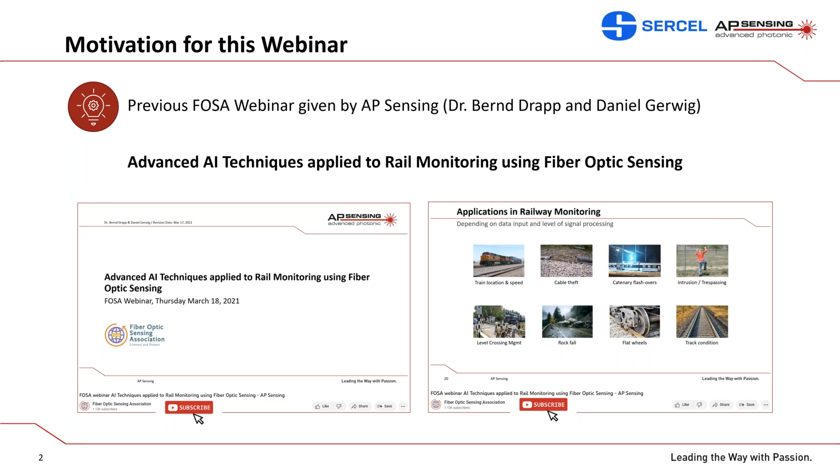So in this webinar, we will offer an overview of both companies, AP Sensing and Sercel, detailing the technologies that these companies provide and delving into various case studies that cover both above and below the rail track. Following the AP Sensing part, I will hand over to Ellen. She will present Sercel and introduce an innovative approach on how trains can be utilized to understand what's going on below the ballast. So AP Sensing is a global leader in distributed fiber optic sensing. We provide distributed fiber optic sensing instruments and solutions for various applications. Our headquarters is located in Böblingen, a small city in southern Germany near Stuttgart.

Although officially AP Sensing was founded in 2007 as an independent company, our roots and experience in fiber optics extend far into the past. AP Sensing originated from the fiber optic measurement business through several spin-offs. The first occurred in 1999 when part of Hewlett-Packard's business, including fiber optic test equipment, transitioned into Agilent Technologies. And in 2007, the second spin-off occurred when the fiber optic business separated from Agilent Technologies to form AP Sensing. We operate as an international company with over 100 employees across 4 continents. AP Sensing holds all necessary ISO certificates in quality management, environmental management, work safety management, along with different important industry certifications.

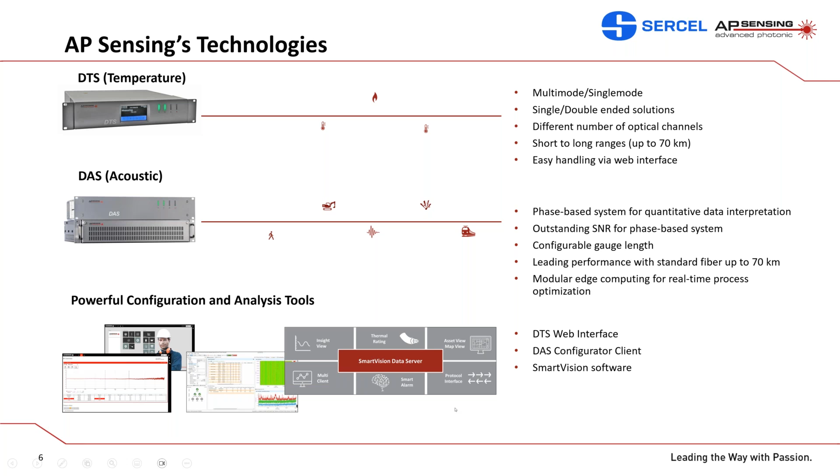Our DAS instrument is a phase-based system that offers quantitative data interpretation. It stands out with an outstanding signal-to-noise ratio and great performance utilizing just a standard fiber. Notable features of our DAS include, for example, configurable gauge lengths and edge computing for real-time process optimization. AP Sensing is not only a manufacturer of distributed fiber optic systems, we're also a software company, so we provide powerful configuration and analysis software tools. These software tools extend our services beyond the instrument to data interpretation and data analysis. So at AP Sensing, we operate in various markets and applications.

We also work in oil and gas upstream applications, different geo-related applications, and of course, we work with our systems in the railway industry, the topic of today's webinar, including such applications as train tracking, asset condition monitoring, cable theft, intrusion detection, and tunnel monitoring.

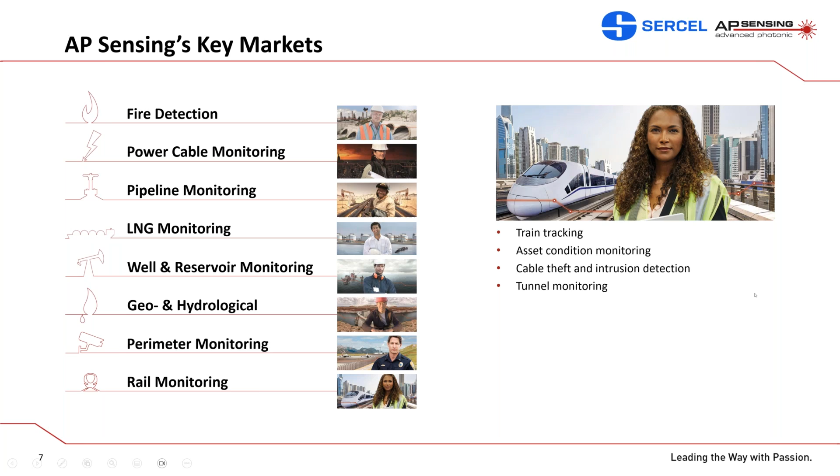So the idea of the method: we plug a fiber into the DAS. The instrument sends a laser pulse into the fiber. Fibers are not perfect. There are always very tiny microscopic defects randomly spread along the fiber. When the light pulses propagate along the fiber, part of the light is subjected to Rayleigh backscattering. This backscattered light goes back to the system, and the interrogator analyzes this backscattered signal.

The position of the acoustic events that affected the fiber can be determined by measuring the temporal dependence of the returning signal, like a radar echo. So what if we place this DAS concept in the context of railway monitoring? Of course, we will need a DAS system, and we will need a fiber optic cable.

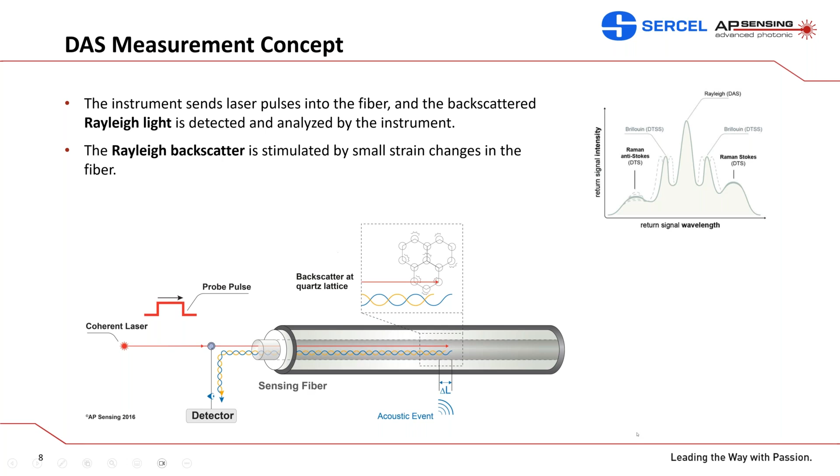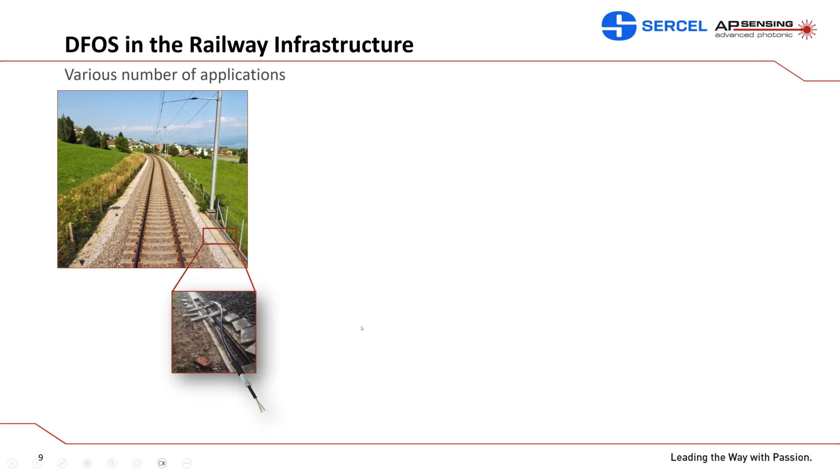Actually, in railway monitoring, the availability of fiber is not typically an issue, as there is most likely an existing trackside telecommunication cable infrastructure, like shown in this picture. Here's the cable in the trough, and we can just utilize the existing fiber optic cable. We do not need to deploy any special fiber, which allows us to transform the standard cable into a sensing cable and enables us to utilize DAS in various areas of the railway infrastructure.

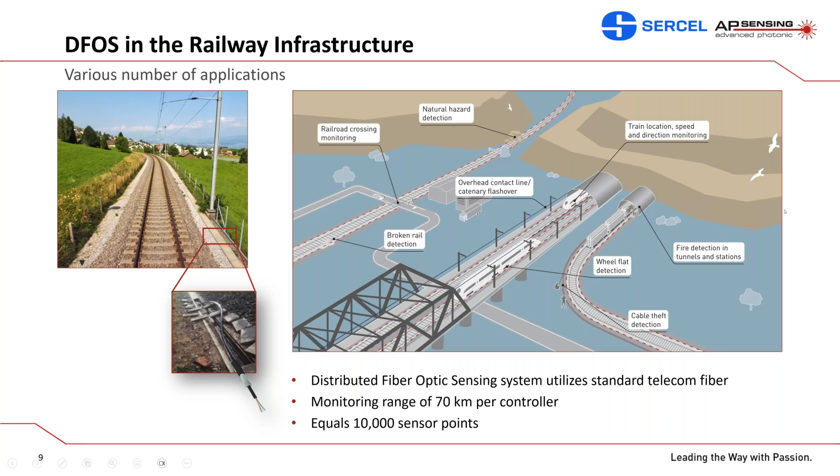For example, train location, speed and direction monitoring, flat wheel detection, natural hazard detection, short circuit localization, and many other applications. Fire detection is also possible with fiber optics, but since it's about DTS, we're not going to cover it in today's webinar.

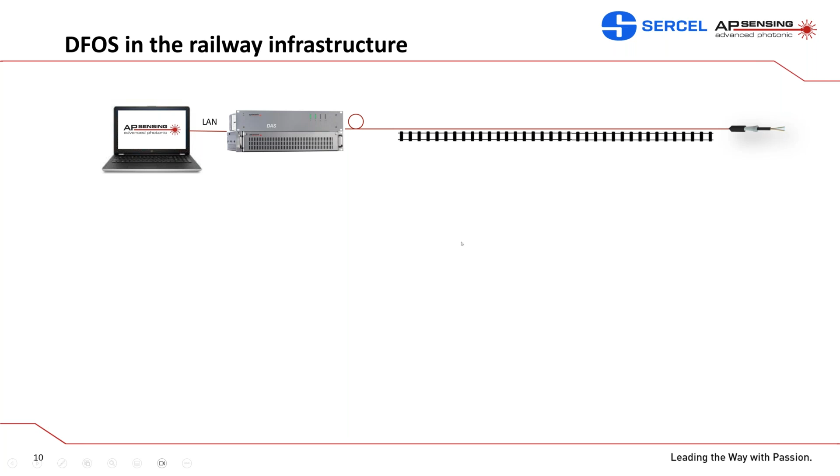Since I will be showing several case studies on DAS data and how this data can be interpreted and presented, I would like to start with a very simplified explanation of how DAS and the fiber work in the context of railway monitoring and what kind of data we can see. Let's consider this simple example: the rail track, the existing fiber along the rail track, DAS connected to the fiber, DAS connected to the laptop. If we have a train passing along the rail track, what can we see?

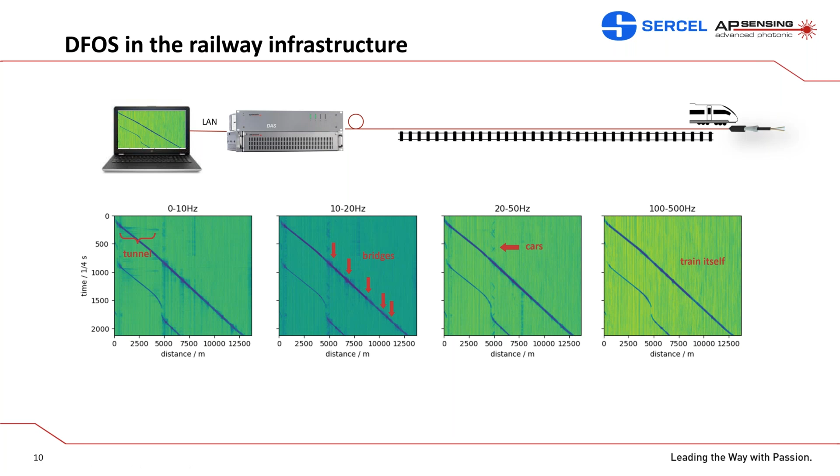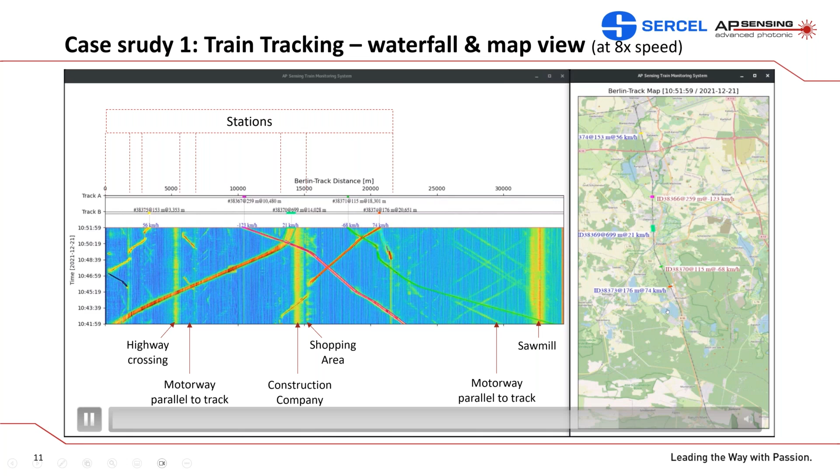The main outputs of DAS live tracking are train position, train length, velocity, acceleration, unique train IDs, and unique track IDs, since we can split the information that we receive from the train and from the track.

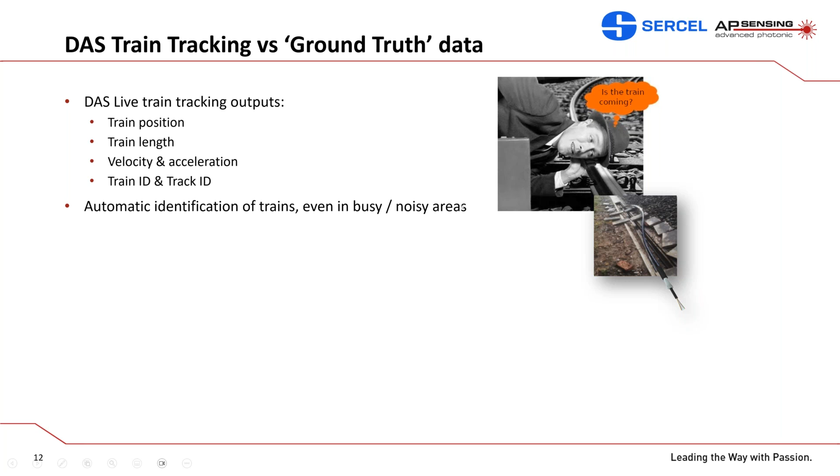Can we somehow prove this information that we're receiving from this fiber optic cable? Yes, there are several technologies available to measure train position and speed along the fiber, along the railway track. One of them is optical odometry.

Comparing the results of DAS live tracking and optical odometry, we see these results match quite well. So we're providing very accurate GPS position, speed, and length of the train utilizing DAS data. The positional accuracy is within the first meters.

DAS technology was proven for two parallel running tracks with one fiber. It works well with fiber installations in tunnels or on bridges, and it works well for both high-speed and low-speed trains.

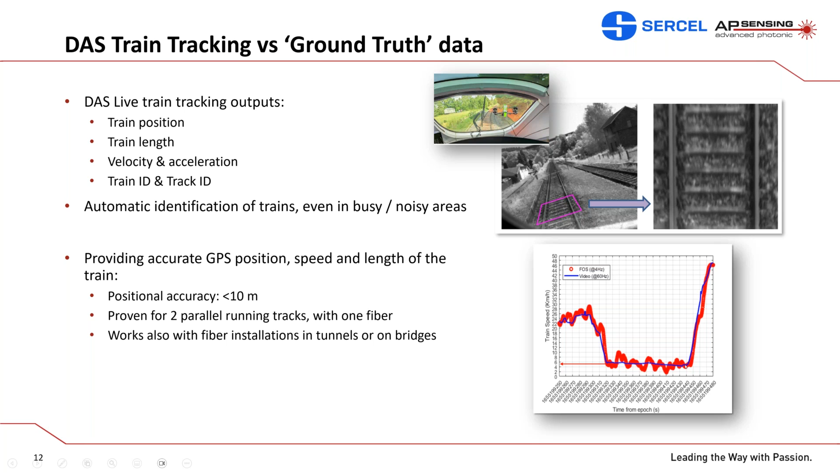Taking railroad assets as an example, distributed acoustic sensing can be an excellent tool not only for train tracking, but also for monitoring different railroad assets. For example, utilizing DAS data, we can efficiently localize short circuits along the railway.

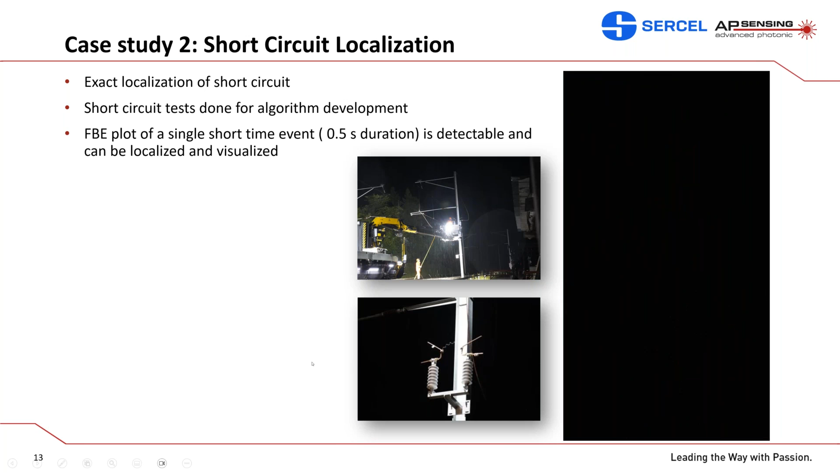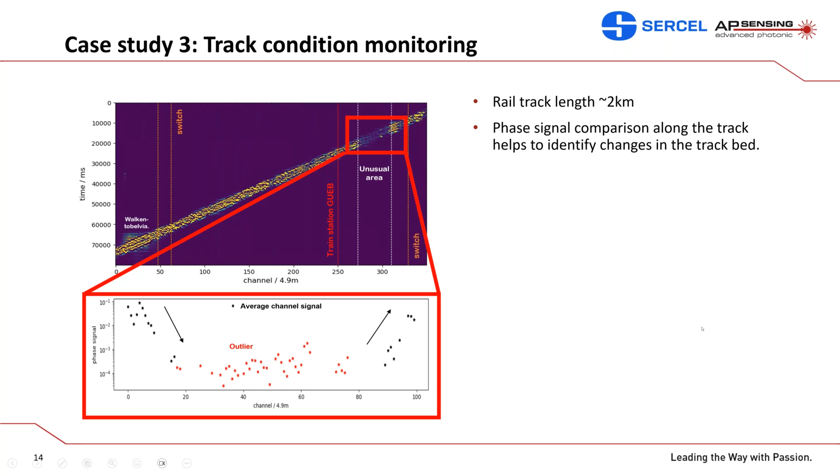Other assets that can be monitored with DAS and fiber are rolling stocks, as we can split the signal from the rail track and from the train. For example, when there is a flat wheel, it generates a distinct acoustic signature due to the different shape of the surface of this flat wheel. These irregularities lead to vibrations and noise when the flat portion of the wheel repeatedly touches the rail itself.

And this information gathered from the DAS can also contribute to maintenance planning and helps operator to fix and schedule maintenance activities more effectively.

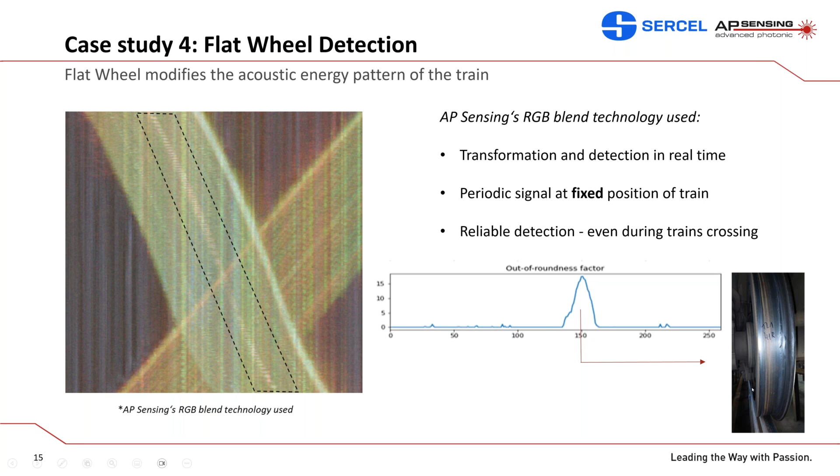So therefore, this is really helpful tool to understand that there are some third-party activities are going on along the track. And we can prevent the property damage and consequences from this kind of activities.

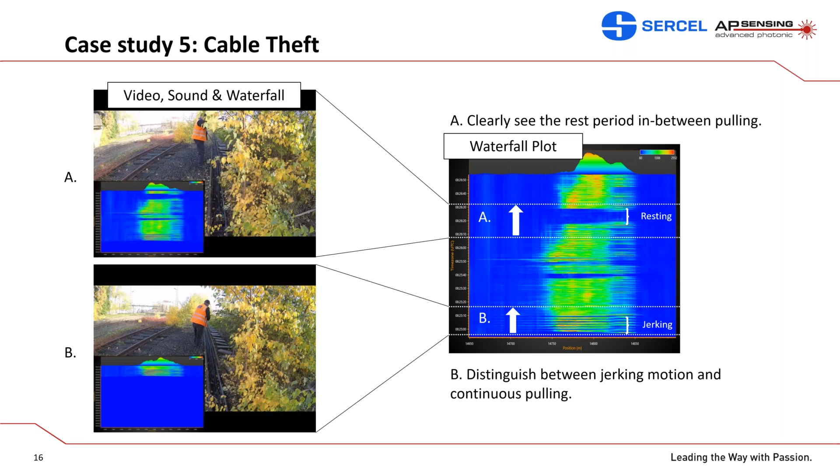So gradually we are moving towards the events that can approach the fiber optic cable, not from above the surface, but from below the surface. So what kind of acoustic events can be detected from below the surface? It's seismic waves, of course.

And the seismic waves can be generated by different events like earthquakes, explosions, large landslides, etc. So seismic waves are divided into two main types of waves that travel through the Earth's surface or along the surface.

Here's a very nice animation that represents these different types of waves. So here you see the waves traveling through the surface, let's say from the earthquake event, and another type of wave traveling along the surface. And here just a seismogram that detects these seismic waves.

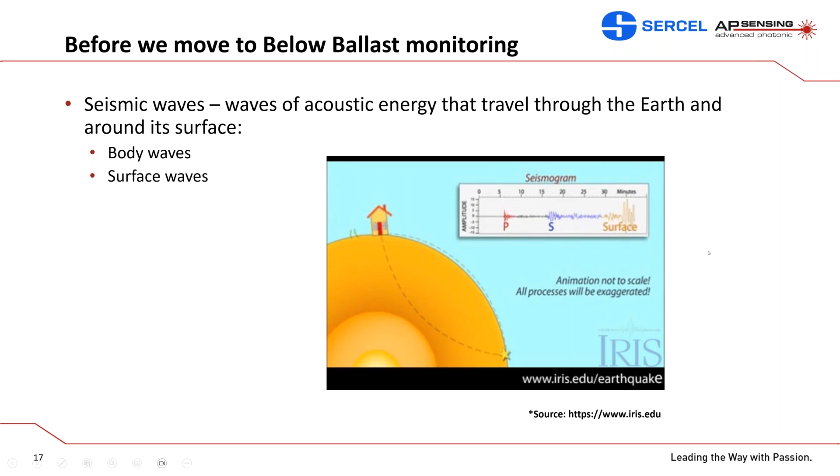So I would like to illustrate how the seismic waves generated by earthquakes can be detected by the DAS system using examples of two devastating earthquakes that occurred this year, one in February in Turkey and another one in September in Morocco. So here you can see some information about these earthquakes.

There was very high magnitude, but at different depths, and we detected these earthquakes, but they were located using the DAS in Switzerland along the rail track. You see that the distance between the earthquake location, the epicenter, and the DAS in case of the earthquake in Turkey is 2,600 kilometers. And in case of the earthquake in Morocco, it was around 2,300 kilometers.

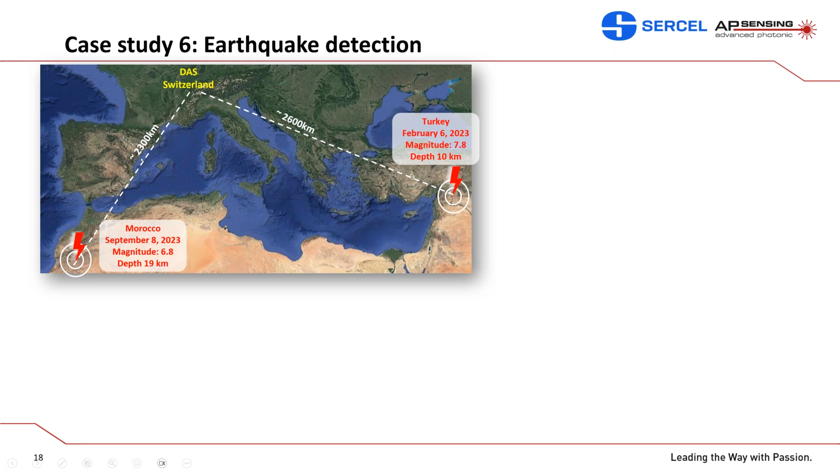So here we can see two waterfall plots detected from the earthquake from Turkey. Distance on the horizontal axis and time on the vertical axis. And this red signal, it's seismic waves that were detected by the DAS.

We do not see body waves really clearly, but we see the arrival of surface waves, and we see arrival of some waves during the aftershock events.

And here just another representation of this, utilizing just one of the DAS channels, like we used to see this data on the seismograms. Again, you see, we couldn't really identify body waves, but we can see the surface wave arrivals.

If we look at the Morocco case study, here's a bit more zoomed waterfall plot, just 500 meters and 5 minutes, but also we could detect the seismic wave arrival.

And here just another representation utilizing one of the DAS channels. Here we could see more clearly primary and secondary wave arrivals. And again, more signal came from the surface waves.

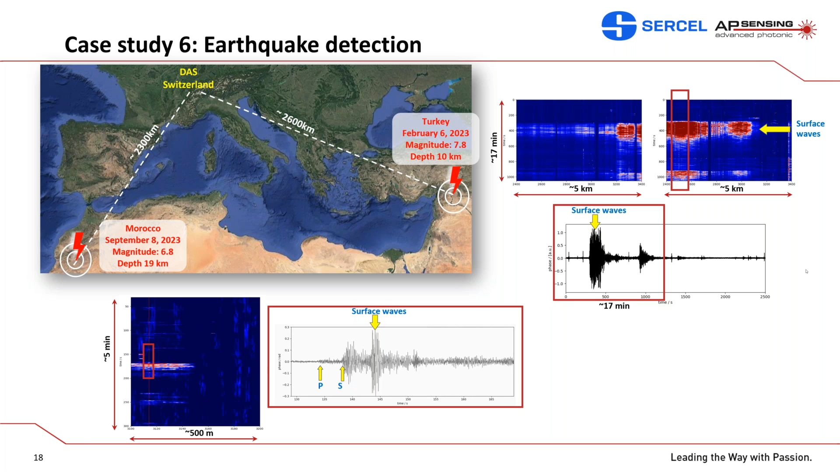Please. Yes, thanks, Lena, for the transition. That's a perfect transition.

I'm Hélène Toubiana, a geophysical engineer with 15 years of experience in seismic imaging.

Today I will speak about what can be done with fiber optics and the system below the ballast, thanks to seismic waves. I work for Sercel, a company that historically designs and manufactures equipment for seismic acquisition and provides geophysical processing for natural resources exploration. We have 1,050 employees worldwide with 800 engineers, and we are part of CGG Group, which is a leader in seismic imaging.

Sercel is a leader in seismic solutions. We create, produce, and integrate sensors for high-fidelity seismic imaging, like high-sensitive accelerometers and helically wound fiber. Maybe no one knows about this fiber: for every 1 meter of cable, you have 2 meters of fiber. This allows for more sensitivity in every direction and spatially reduces the gauge length.

Sercel also develops geophysical software and services. These sensors and services are used in different domains.

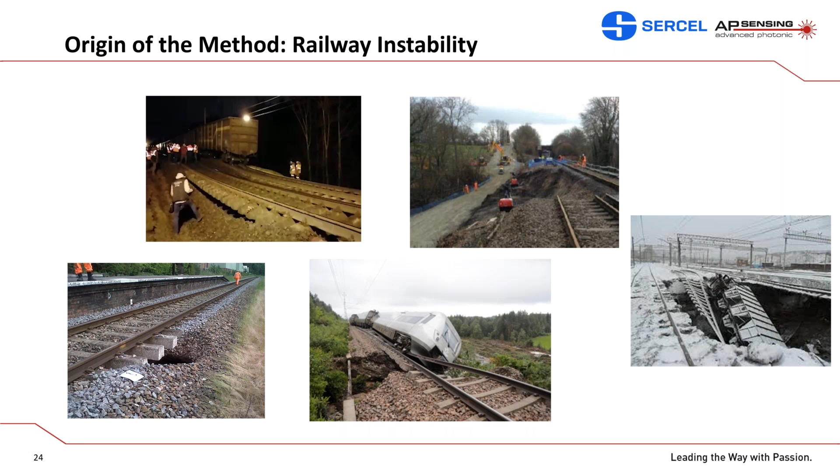This phenomenon is the impressive conclusion of a slow process of underground decompaction, coming from natural and anthropogenic origins. It starts with decompaction, then cavity growth with subsidence, and finishes with a sinkhole, which is the dramatic event. It can take years to develop.

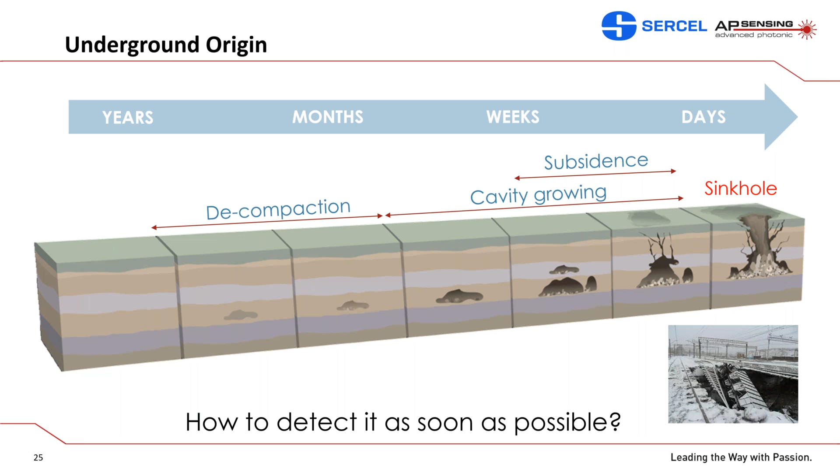The motivation of our work is to find a method to prevent this accident by detecting it as soon as possible. But how?

For this, we decided to develop a dedicated methodology based on the use of seismic waves generated by the train. Indeed, first I have a question for you: have you ever felt the ground vibrating below your feet when a train is arriving?

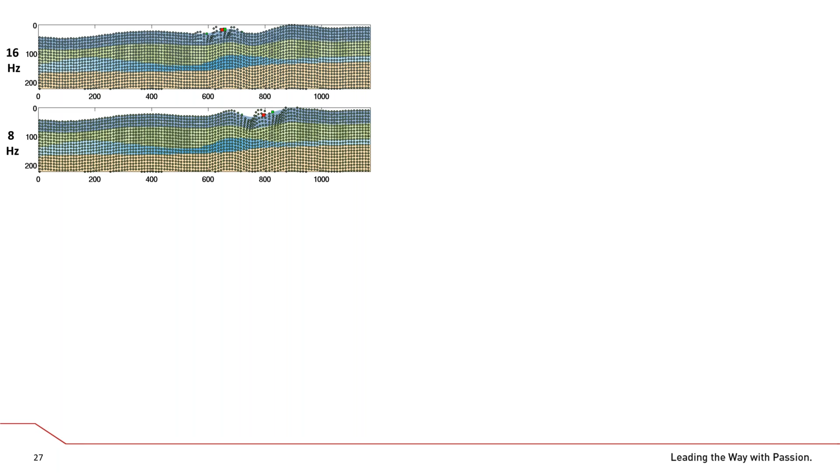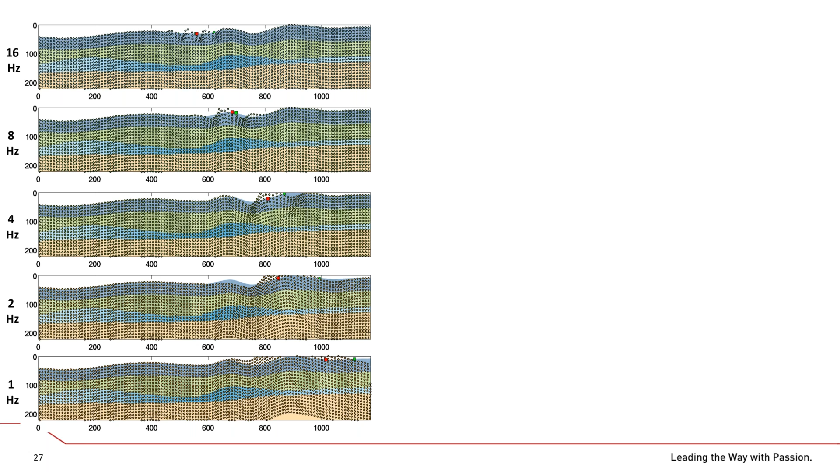If we decompose it into frequency bands, we can see that the high frequency content scans the very near surface. Lower the frequency, larger the wavelength, deeper the penetration, higher the propagation velocity, and faster the propagation.

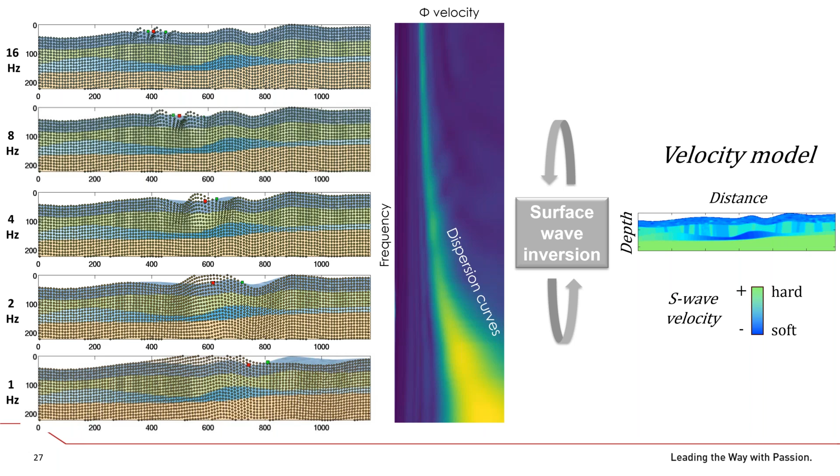That is what we call the dispersion behavior, and we can measure it thanks to DAS or accelerometers. After an inversion process, we can retrieve a velocity model of the near surface rocks. Stiff and soft areas will respectively appear as fast and slow velocity spots. That's how we can detect a zone under decompaction before a sinkhole occurs.

So the processing flow for this study is to record the signal along the railway, thanks to DAS or other sensors, then detect the dispersion curve, pick it, and run an inversion to obtain a velocity model of the subsurface.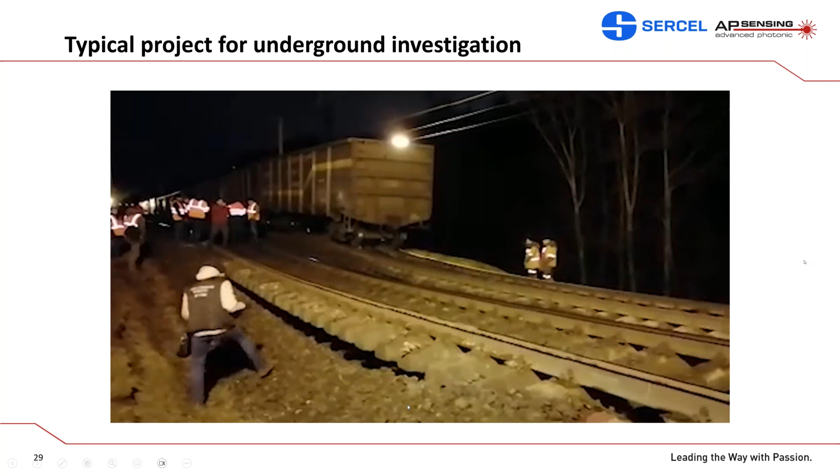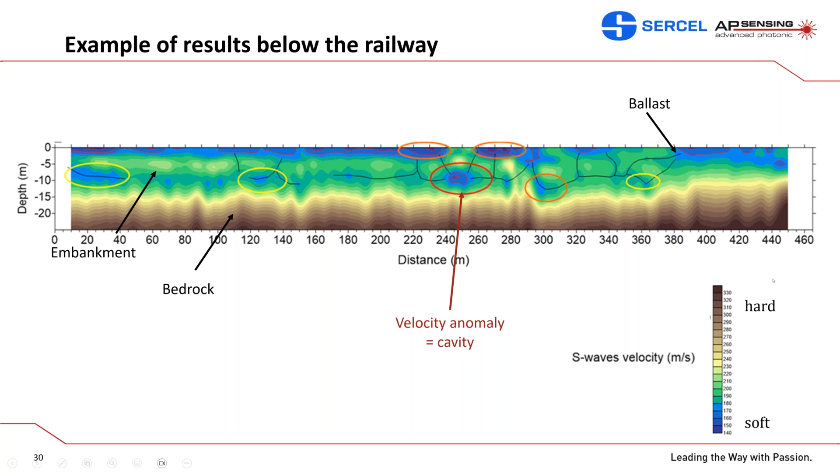This service was provided by using accelerometers for a few years now. But for many reasons, accelerometers are not adapted to be deployed in the long range. So we were thinking, what about DAS? Can we use that for the same application? Yes, there is a DAS opportunity.

Railways are linear assets, often equipped with telecom fiber, as Lena said previously. We wondered, can we use this fiber with the DAS system to perform the same image? Let's see it through different case studies. The first case study is about a project that has been done with SNCF on a high speed line. It's an area characterized by ballast instability.

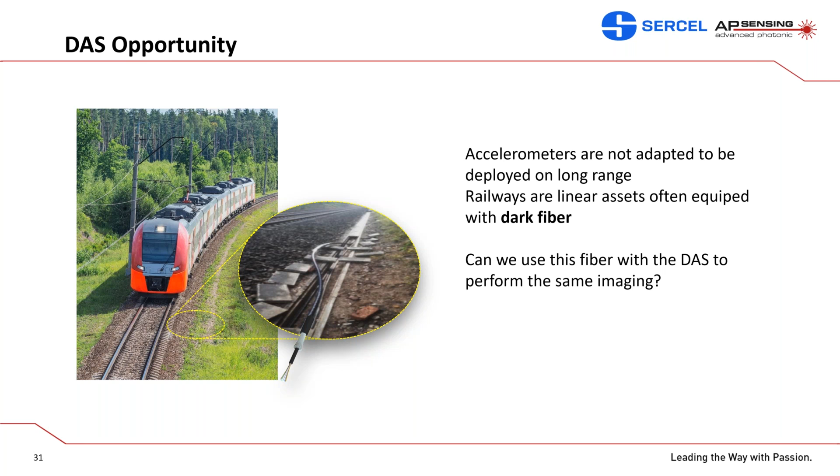The first target of this project was to identify if there is instability due to decompaction, and the second target was to benchmark and assess the capability of DAS to detect this decompacted zone. Next, please.

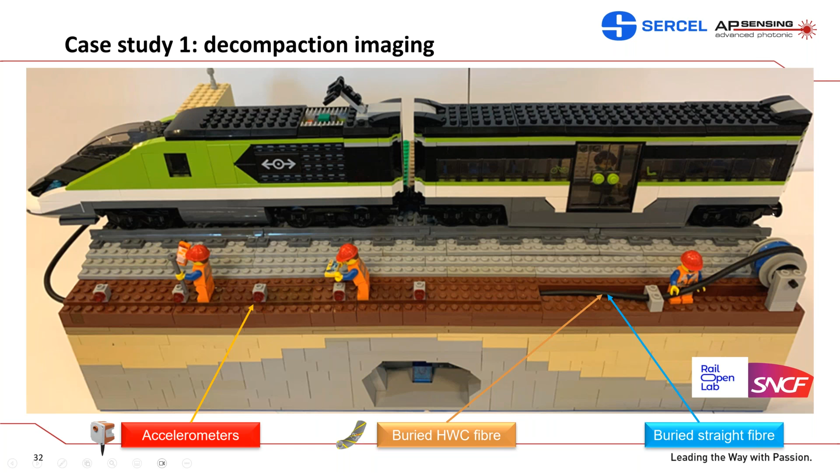After, the buried fiber, which is well coupled, and even the telecom fiber. So every one of them is able to detect and image this decompaction area. Next, please.

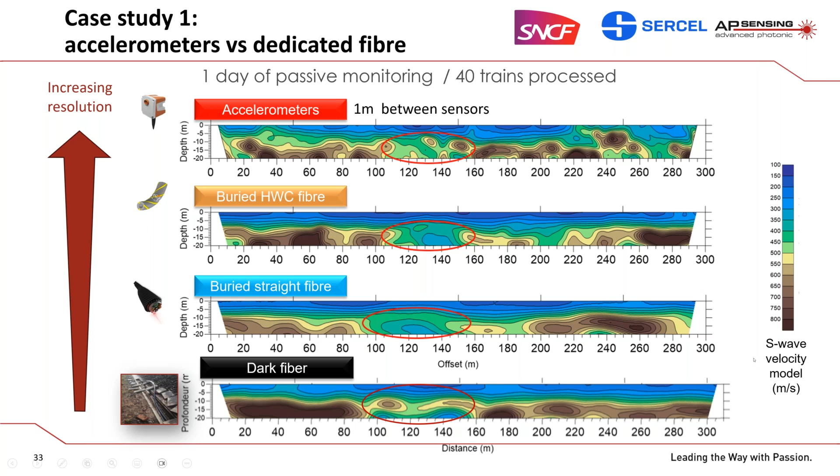The last case study is about the dark fiber capability. As mentioned previously, we are able to detect the decompacted area with a low resolution. So we wanted to know what can be done and which lengths can be done with telecom fiber.

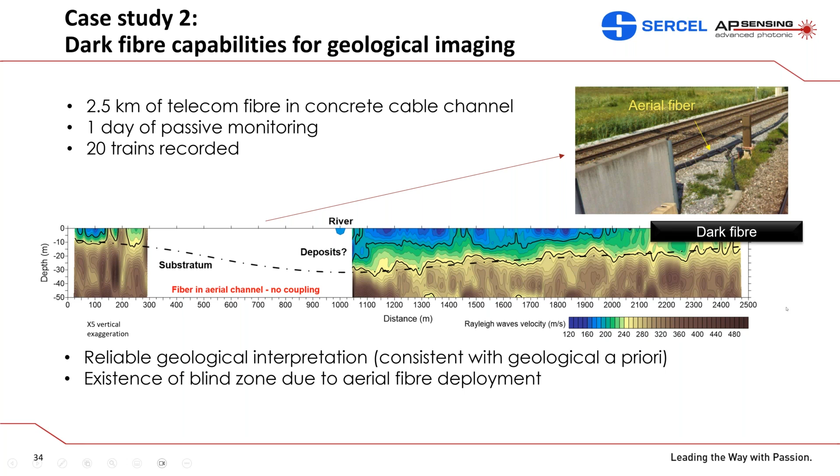That means that in this part, we have a start of decompaction of the soil. So this monitoring can be really useful by looking at the difference of each section and to monitor the risking area, especially now due to climate change.

So therefore, to scan and evaluate what's happening below the railway, we show that the telecom fiber is a good opportunity because it's already there to have a big picture of what's happening below the ballast. A scan of a long distance below the railway can be done with cost efficiency.

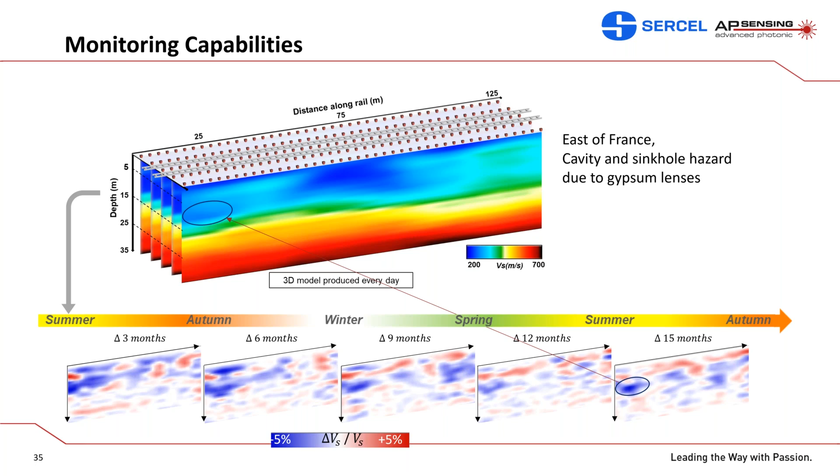So to conclude, railway monitoring is important in today's environment, particularly the capability of train location, track condition monitoring, and hazard detection. Use of fiber optics opens numerous opportunities for above and below the railway monitoring. We show that existing trackside telecommunication and fiber optic signaling cable can be repurposed into sensing cable, or alternative dedicated cable can be installed to enhance the railway protection.

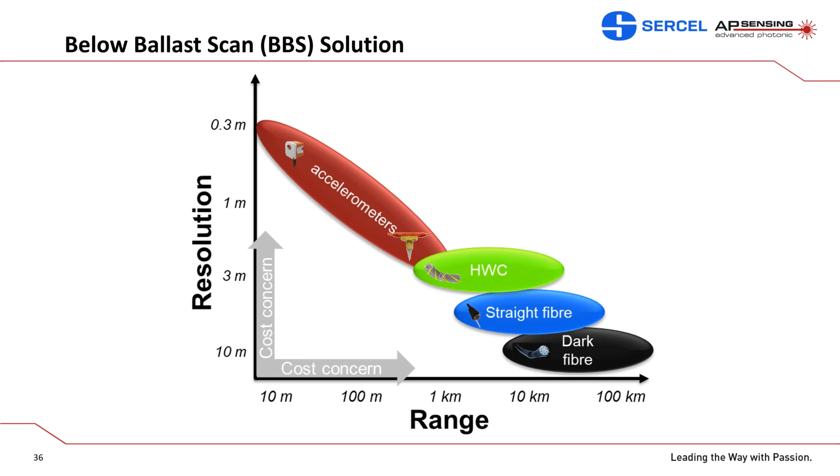Next, through this webinar, we've demonstrated the particular application of existing telecommunication cable for real-time train tracking and asset condition monitoring. This application supports condition-based maintenance strategy and contributes to prevention of potential failure. Furthermore, advanced seismic methods using DAS present a significant opportunity for the identification and monitoring of zones of danger prior to detection of the problem from the surface.